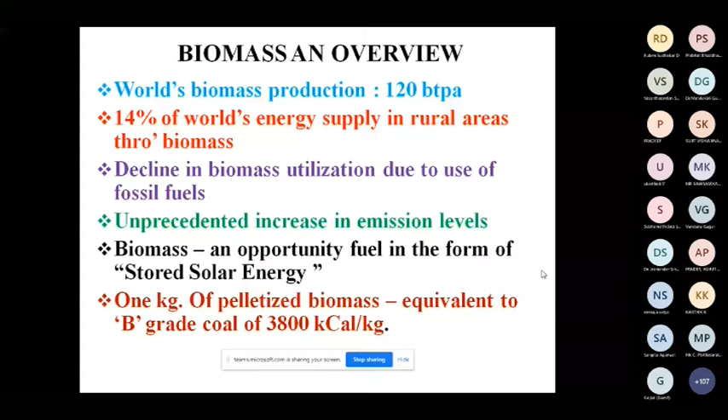So biomass can be environmentally friendly, and it can also be a renewable resource, because the plants that make biomass can be grown again and again. So biomass fuels provide substantial benefits as far as the environment is concerned.

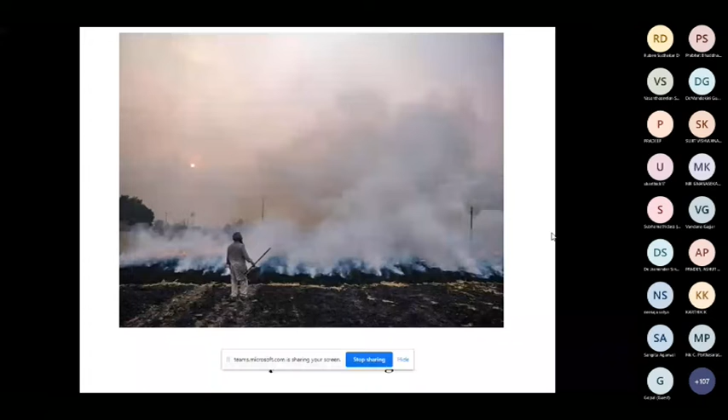Biomass combustion tends to generate dust that stays airborne longer than coal. This is what you are seeing in the picture from the Punjab, Haryana side - trouble from burning of the crop residue, smog, and poor air quality. This affects the capital Delhi very much, as you can see. Last September, you would have seen in the newspaper that the Indian government has asked thermal power plants located within 300 kilometers of the capital Delhi to co-fire biomass with coal to reduce pollution. You know what happens in Delhi in the months of November, December, January.

Pollution, mainly particulate matter and aerosols, is caused by farming - the burning of straw fuel in and around Delhi areas. The Commission for Air Quality Management for the National Capital Region (NCR) and adjoining areas has identified 11 power plants to co-fire 5% to 10% biomass with coal. This direction has been given to all 11 coal-fired power plants to use 5% to 10% biomass with coal to cut pollution and reduce stubble burning in farms.

According to the Federal Environmental Ministry, paddy straw burning is a matter of grave concern in the national capital region and adjoining areas. Proper utilization of paddy straw is an important strategy among the various means to reduce burning. So there is a need, given the surplus biomass availability, for disposal of agriculture residues - not just disposal, but safe disposal of agriculture waste. You cannot burn it as you like in the farms.

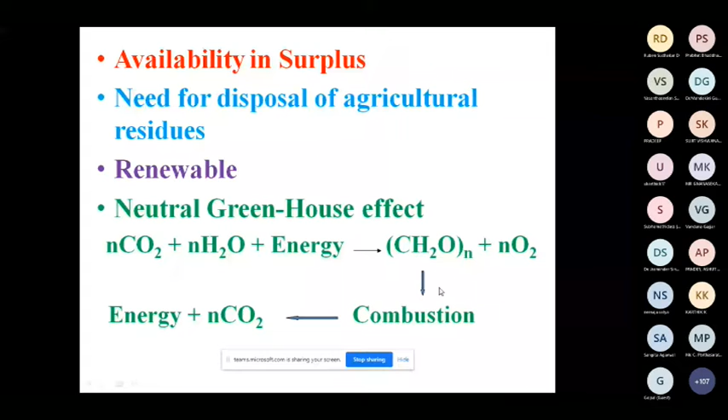Non-fossil biomass fuel is again renewable; it gives a neutral greenhouse effect. From photosynthesis, biomass is formed; from biomass we get energy back through combustion, releasing CO2 again. So this is what is meant by neutral greenhouse effect. Again, biomass can be a source of liquid fuel - you can go for biodiesel. In the last session you have seen wood gas.

Most biomass is used as a solid fuel. It is also used in limited amounts for biodiesel and biogas, but solid fuel remains the most common use.

There are opportunities to grow industrial biomass from numerous types of plants, including miscanthus, switchgrass, corn, willow, sugarcane, and bamboo. So opportunities are available to grow energy crops.

Now, all biomass fuels are not the same. There is a lot of variation within the various types of biomass. The same biomass in our country versus another country will differ in quality. So all biomass fuels are not at all the same—you have to understand that.

To use biomass as fuel, or to design a boiler or equipment for heat and power generation, one needs to understand the characteristics of the biomass in order to avoid possible problems and utilize it more effectively. So there comes the characterization of biomass fuel.

As I told you, in the 1990s I did a research project on these biomass fuels. There I utilized all 12 characterization techniques for biomass characterization. Now I am going to explain what I did in 1995.

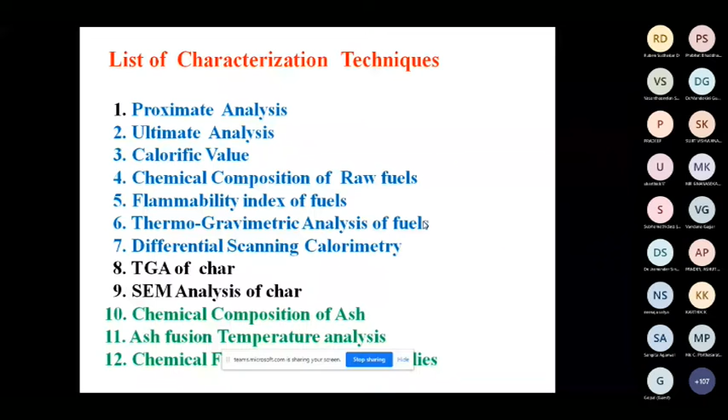As I said, I selected 7 biomass fuels for my characterization study. Of course, others have done similar work, but my focus is on these 7 biomass fuels: coir waste, groundnut shell, bagasse, sawdust, wheat straw, rice straw, and rice husk. These are the 7 biomass fuels I focused on in my research project.

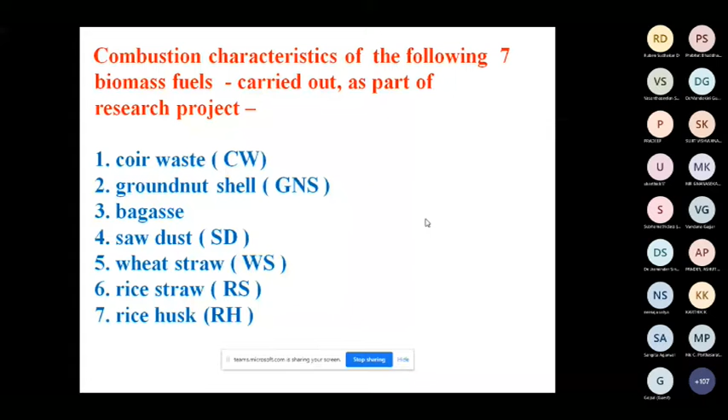Let's start with proximate analysis. I don't know how many are familiar with proximate analysis. Proximate analysis means determination of moisture content, volatile matter, fixed carbon, and ash. I will explain how we do this in simple terms.

You take about 1 gram of sample, weigh it in a crucible. The crucible is placed inside an electric hot air oven maintained at 105 to 110 degrees C, and allowed to remain for 1 hour. Then you take it out and find the weight loss. Whatever weight loss you get after keeping it for 1 hour at 105 to 110 degrees can be accounted for as moisture. The percentage moisture equals the loss in weight divided by the weight of the sample. So this gives the moisture content.

The second one is volatile matter. The dried sample left in the crucible is covered with a lid and placed in an electrical furnace, a muffle furnace, maintained at 900 degrees—some people say 925 degrees. ASTM says 900 degrees, though some use 925. At 900 degrees, keep it inside the furnace for 7 minutes. The sample should be covered with a lid.

Then take it out and find out the weight loss. Whatever weight loss occurs for 7 minutes at 900 degrees centigrade is the volatile matter. So loss in weight due to removal of volatile matter divided by sample, multiplied by 100, will give you the volatile matter content. So that's moisture and volatile matter.

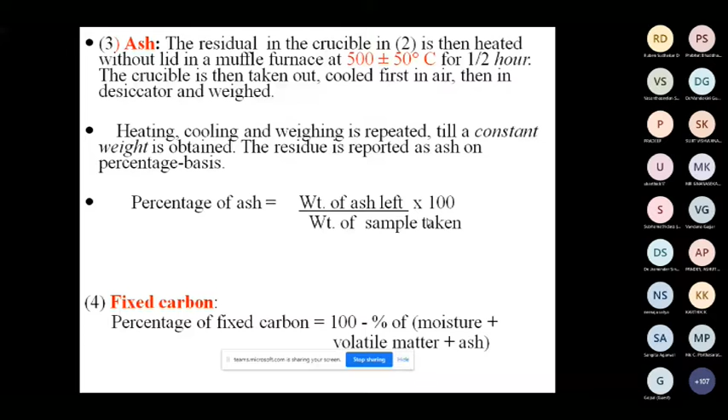Moisture, volatile matter, ash content, and fixed carbon - it's the proximate analysis. The importance of proximate analysis is it provides valuable information with respect to the quality of the fuel. So for any fuel, proximate analysis and calorific value are very primary and very important analyses to understand the fuel.

From moisture, lower moisture means effective calorific value. Moisture quenches the fire in the furnace, hence lesser the moisture, better the fuel. Similarly, for handling, higher the moisture, the more difficult the handling will be.

Volatile matter: high volatile matter containing biomass burns with a very long flame and high smoke. From the ignition point of view and flame stability point of view, volatile matter is good. So high volatile matter content means a high proportion of fuel that will be distilled and burnt as gas and vapor. However, volatile matter present in the biomass may not be completely combustible - sometimes methane, hydrocarbons, CO2, nitrogen, or water may be present. So don't imagine volatile matter is completely useful. Part of it may be combustible, and part may be non-combustible as well.

Ash is a non-combustible matter which reduces the calorific value of the biomass. Moreover, ash causes hindrance to the flow of air and heat, thereby lowering the temperature. It often causes trouble during firing by forming clinkers which block the interspaces of grate-fired boilers. So ash causes a lot of problems - slagging, fouling, deposition, corrosion. We'll be facing a lot of ash-related issues, which we'll deal with finally - what are the ash-related problems.

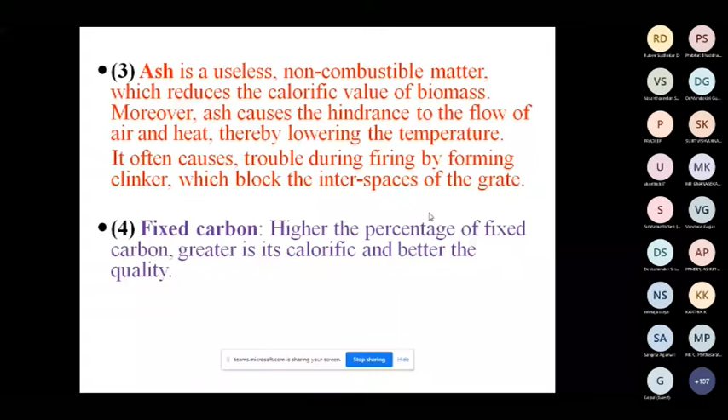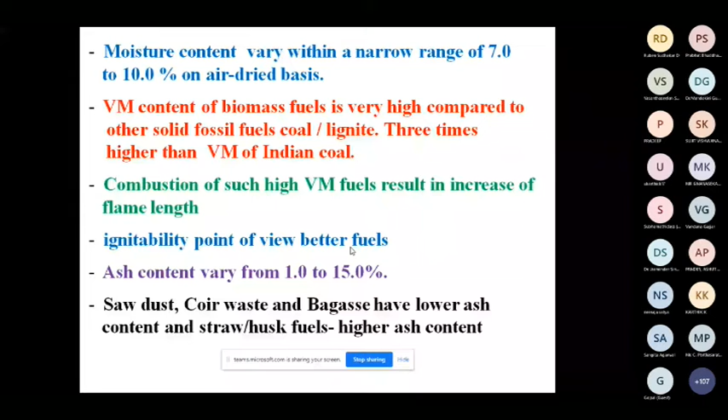Next one is ultimate analysis. Determination of carbon content, hydrogen content, nitrogen, sulfur, and oxygen. This is called ultimate analysis or elemental analysis of the fuel, whatever way you call it. Carbon, hydrogen, how it is determined?

You take accurately 1 to 2 grams of biomass sample, burn it in the current of oxygen in a combustion apparatus. The carbon available in the biomass will be converted into carbon dioxide because of oxygen and high temperature. Hydrogen available in the fuel is converted into water.

These two, CO2 and water, will be passed and absorbed by a potassium hydroxide tube and a calcium chloride tube of known weight. Increase in weight of the KOH tube indicates CO2 content. Increase in weight of the calcium chloride tube indicates water content from water absorption. So from that increase in weight you can calculate carbon, and from increase in water you can calculate hydrogen content.

Percentage of carbon is equal to increase in weight of the KOH tube into 12 into 100, divided by weight of the sample and 44. The 44 is for CO2 - if you have 44 of CO2, then 12 is carbon. So from 44 to 12, the increase in weight gives you the total CO2, and from total CO2 you get how much carbon. Divided by weight of the sample into 100, it will give you percentage of carbon.

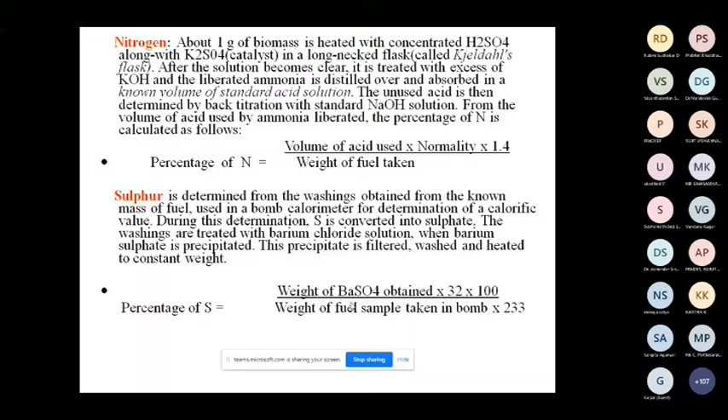Oxygen is obtained differently - percentage of oxygen is equal to 100 minus percentage of carbon, hydrogen, sulfur, nitrogen plus ash content, as we are doing in the proximate analysis. From that you can calculate whatever carbon, hydrogen, nitrogen, sulfur, oxygen content in the fuel. That is called ultimate analysis of the fuel.

These are all conventional analysis methods. If you do it by whatever method I told, carbon, hydrogen, nitrogen, it will take minimum for one fuel - I think 1 or 2 days. Doing the Kjeldahl method, then sulfur method, carbon, hydrogen - it will take maximum 2 days per analysis. Nowadays our instrumental technique has come.

Instrumental technique of carbon, hydrogen, nitrogen, sulfur method involves the quantitative conversion of carbon, hydrogen, nitrogen, sulfur into their respective gases during combustion of the sample at elevated temperature in oxygen. As I said earlier, carbon will be converted to carbon dioxide, measured by IR cell. Similarly, hydrogen will be converted to water, measured by infrared cell.

Nitrogen will be converted to NOx, then again through catalyst it will be converted to nitrogen, which is measured by thermal conductivity. Then sulfur, at very high temperature of 1350, is converted to SO2, measured by IR.

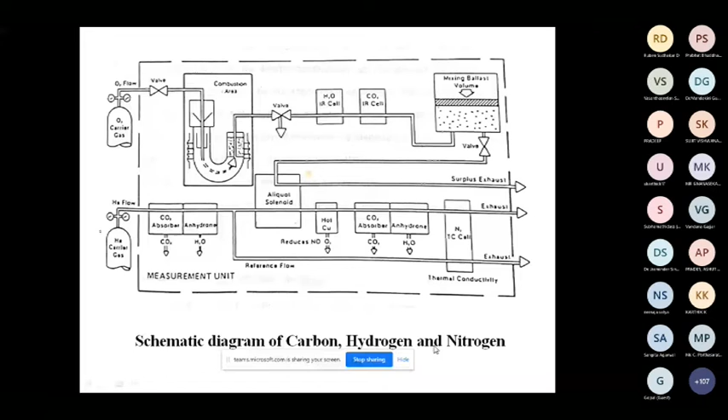Now the significance of ultimate analysis: greater the percentage of carbon and hydrogen, better is the fuel quality and calorific value. Naturally, if you have more carbon and more hydrogen, the calorific value will also be more. Also, a higher percentage of carbon reduces the size of the combustion chamber. The amount of carbon and major combustible constituent of the fuel depend on the type of biomass.

Nitrogen has no calorific value. The only thing is, from a pollution point of view, it will give fuel NOx, hence it's undesirable. Sulfur, although it contributes only a little to heating, produces SO2 and SO3, which are harmful - corroding equipment and causing pollution.

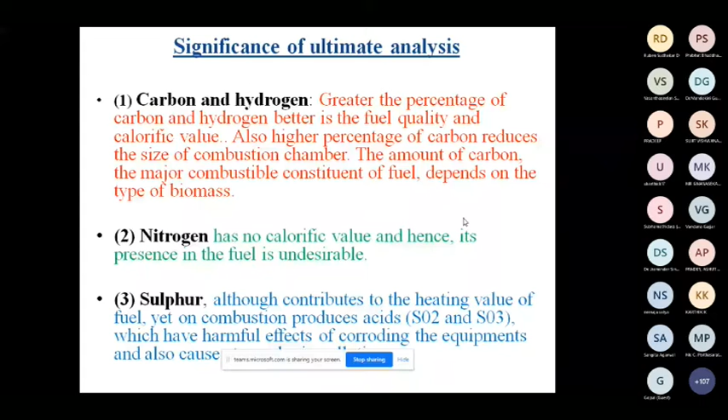So this is the typical result of ultimate analysis for the 7 biomass fuels, compared with coal also - the bottommost is coal. If you see the carbon content of biomass, it is almost similar to coal: here you have 45%, 42%, 42%, or straw fuels maybe around 35, 36 - almost similar to coal as far as carbon is concerned.

But interestingly, if you see the hydrogen content, coal has 2.4% hydrogen, whereas all biomass fuels are almost more than 2 times that - 5.26%, 5%, 5%. So more than 2 times that of coal, the hydrogen content of biomass fuel. In that way, it's a better fuel.

The nitrogen content - except groundnut shell - all biomass fuels have nitrogen content lesser than coal. You have 0.45, 0.61, 0.72, 0.7, 0.2, whereas coal has around 1.06, normally 0.8 to 1.2% for coal. So except groundnut shell, all biomass nitrogen content is much lesser than coal.

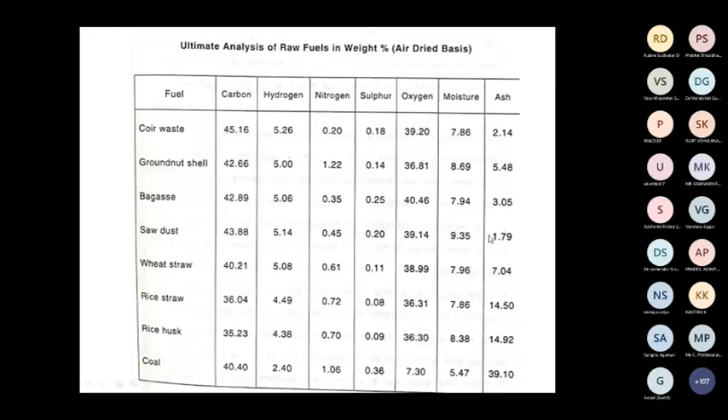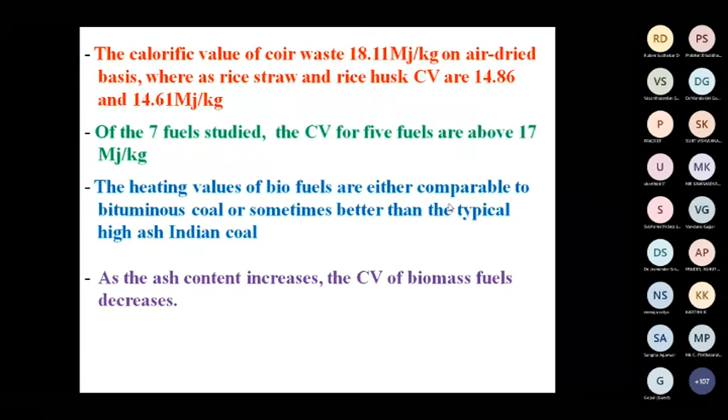Similarly, as moisture content increases, calorific value comes down. High heating value, HHV, and LHV are the same as gross calorific value or net calorific value. Both are the same, whether you call it high calorific value, gross calorific value, net calorific value, or lower calorific value. So as moisture content increases, the calorific value comes down.

Biomass is made up of a structure, mainly a lignocellulose structure. It mainly contains cellulose, hemicellulose, and lignin. The proportion and distribution of these components in the biomass is complex and very important for its use in different industrial applications. So determination of cellulose, hemicellulose, and lignin is very important as part of the characterization study.

Cellulose is a high molecular weight polymer with molecular weight up to 10 to the power of 6, making up the fiber in wood and other biomass. Hemicellulose are branched polymers, also polysaccharides, consisting of shorter chains. Hemicellulose generally evolves as light volatiles. Most of the contribution of volatile matter comes from hemicellulose, producing less char. So the volatile matter contribution from hemicellulose is more compared to cellulose or lignin.

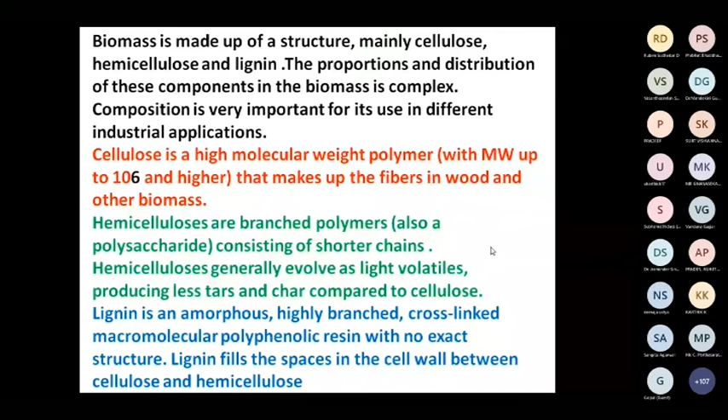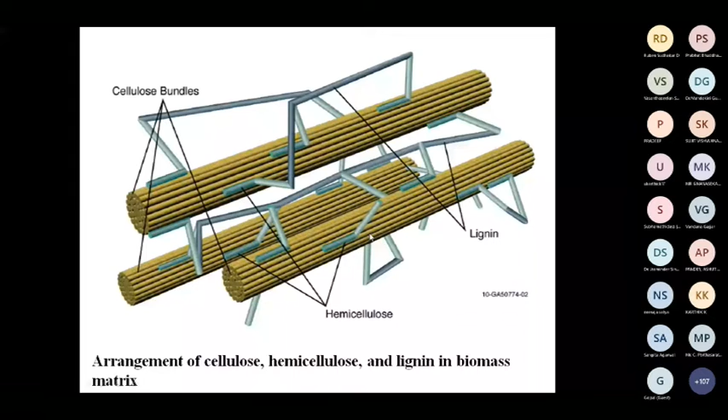Lignin is amorphous and a highly branched, cross-linked, macromolecular, polyphenolic resin with no exact structure. Normally, lignin fills the spaces in the cell wall between the cellulose and hemicellulose. This is the structure, the arrangement - these are all cellulose, these are all hemicellulose, attached by the lignin content. These are the lignin content, showing the arrangement of cellulose.

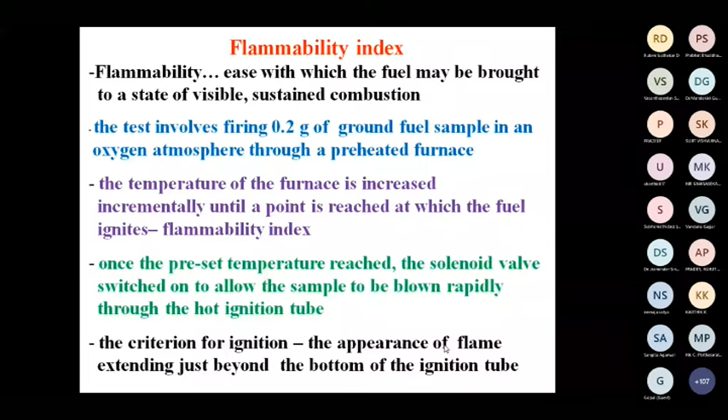This is the instrument for flammability testing - this is the furnace. Here you take the finely ground sample, and here there is a solenoid valve. Oxygen is supplied from a cylinder under pressure.

You go on increasing the temperature of the furnace as you decide. Once the temperature is set, you open the solenoid valve. Through oxygen pressurization, the sample is pushed through these tubes, and there you watch for the flame. If there is a visible flame, that is the ignition point.

Otherwise, you increase the temperature by another 5 degrees, going on increasing right from ambient temperature or from 200 degrees. At what temperature do you get a stable flame? Each time you have to put the sample in and then operate the solenoid valve.

So flammability refers to the lowest temperature at which a visible sustained flame appears. If we compare the flammability temperature for all the fuels, it varies from almost 350 to 400 degrees. For coal, we have 500 degrees.

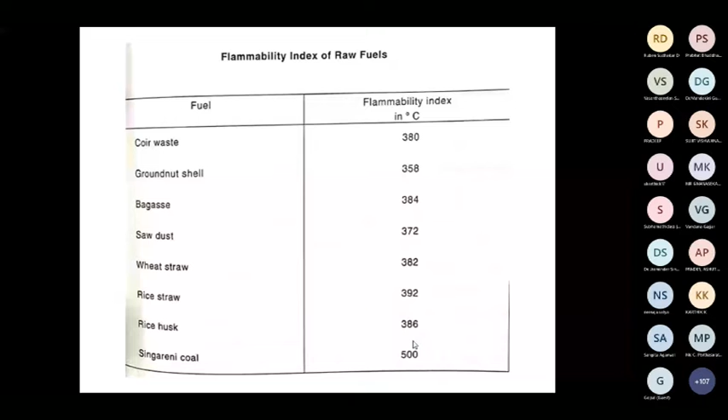So from a flammability point of view, biomass fuels are better fuel, easily ignitable due to high volatile matter content. Flammability refers to the lowest temperature at which a visible sustained flame appears. The flammability index of biomass fuel is within a very narrow range, 350 to 400 degrees C, which is less than fossil fuels. Stable combustion can be easily achieved at comparatively lower temperature than coal, as biomass fuels are more reactive with respect to flammability characteristics than lignite or coal.

As hemicellulose content increases, flammability index decreases. Higher the hemicellulose content, the more volatile the fuel, so naturally the flammability index or temperature comes down, making it easily ignitable.

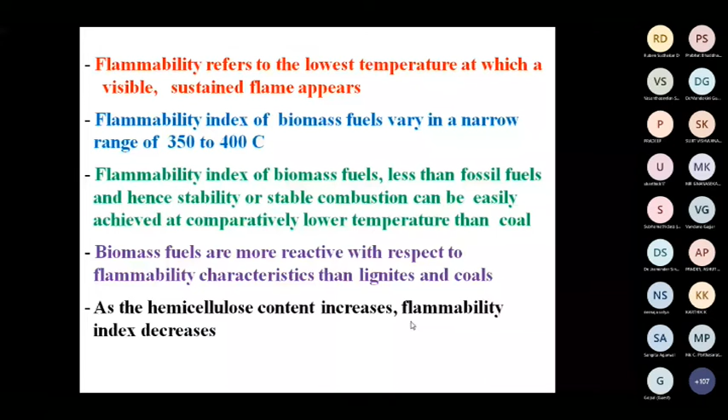Next characterization: fuel size and density. The size and density of biomass fuel particles affect the burning characteristics of the fuel by affecting the rate of heating and rate of drying during combustion. So size and density play an important role with respect to combustion.

Fuel size also dictates the type of handling equipment used. Wrong size of fuel will have an impact on the efficiency of the combustion process and may cause jamming or damage to the handling equipment.

Smaller sized fuel is more common for commercial scale systems because smaller fuel is easier to use in automatic feeding systems and also allows finer control of the burning rate. The smaller the fuel, the more finely you can control the burning rate, making it easier.

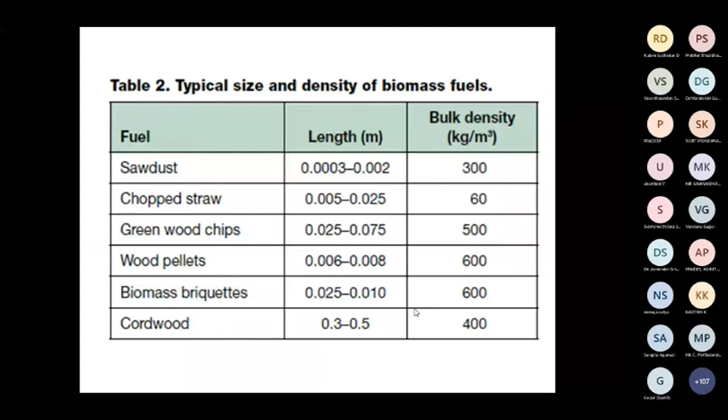Regarding strength and bulk density, the higher the size, the more the bulk density will be. So fuel size and density are probably the most overlooked factors affecting fuel performance and should be given careful consideration when selecting the fuel type.

Biomass can also be delivered to power plants in bales. For example, straw fuel in the form of bales can be supplied and delivered to power plants. This format is mostly used for straw and requires special equipment to remove the strings and break up the bale, or the plant may be designed specifically to burn bales.

Bales are relatively easy to transport, have good bulk density, and can also be stored in the open for shorter periods of time. Modern large bales can weigh up to 300 to 500 kg.

Dry biomass needs to be stored under a cover to avoid self-heating. Self-heating is another important aspect, leading to decomposition, growth of spores and fungi.

Lower bulk density, 200 to 500, compared to coal means volume to store as well as physical transport capacity will be large compared to coal. Coals are high density fuels compared to biomass fuel. These are low density fuels, biomass.

So methods to increase the bulk density are pelletizing or briquetting. These are the techniques available to increase the bulk density of the fuel, which also improves the bulk handling properties of the fuel. And dried pellet or briquette will have a higher calorific value. That's another advantage, but it is more expensive.

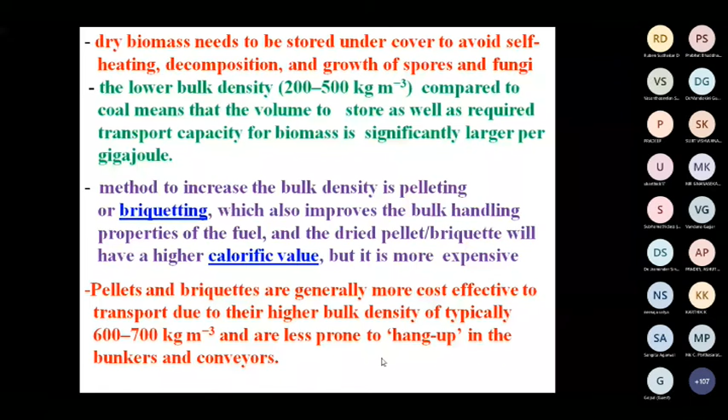These are the pellets, wood pellets. Pellets are biomass compressed to small cylinders with a typical diameter of 5 to 15 mm and length around 10 to 50 mm. They have higher standard bulk density and are clean and dry comparatively because of pelletizing, as all the moisture gets removed. There will always be less than 10%, so consistent quality you can get.

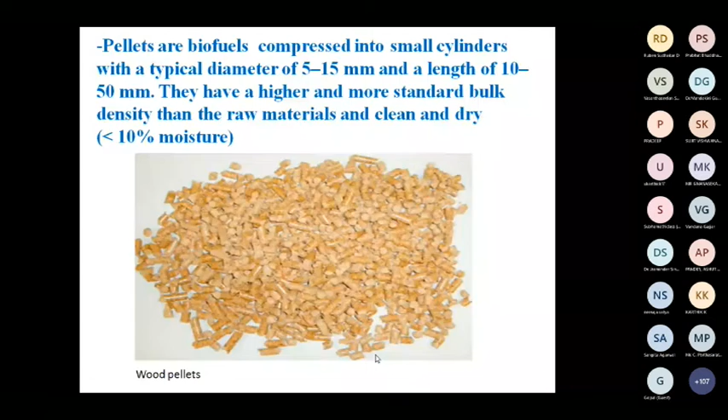Next technique is the characterization technique, thermogravimetric analysis, TGA. The thermogravimetric analysis measures change in weight of a material as a function of temperature or time in a controlled temperature program atmosphere. Here, while heating the sample, ultimately through combustion, what we are doing is heating the sample fuel.

While you are heating the fuel, what happens to the mass weight? That is what we are studying with the TGA technique. You cannot study the mass loss within the boiler, but you can simulate the conditions of heating in the laboratory instrument, that is TGA. You have the furnace and balance both together, so you measure the change in weight as a function of temperature or time in controlled heating.

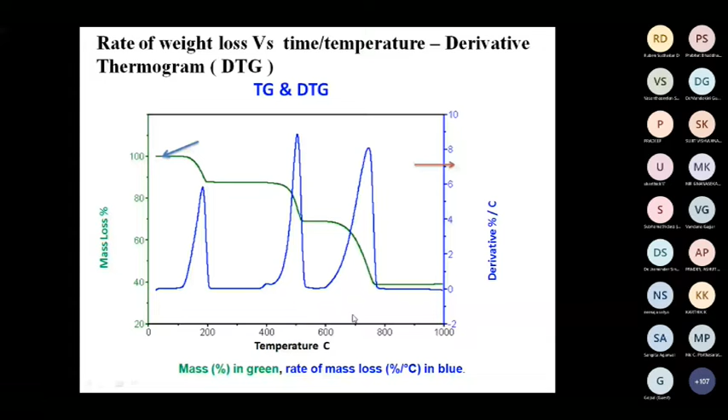This is again, for the coal chart, the weight loss thermogram. This is the derivative thermogram, the blue one.

So the burning profile technique is for assessing - ultimately we are interested in the combustion reactivity of any fuel, whether coal or biomass, any solid fuel - the combustion reactivity, the time, speed, rate at which you are handling the combustion, heating. So the burning profile technique for assessing the reactivity is where the derivative thermogram output signal from a thermobalance system is plotted against the temperature. That is called the burning profile test.

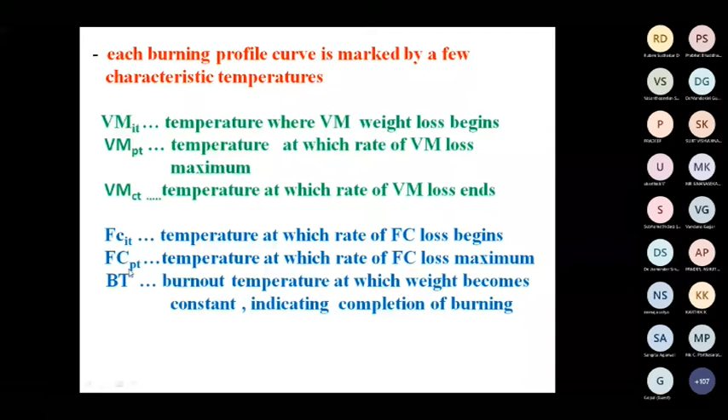So this is VMIT, initiation of volatile matter; the temperature at which volatile matter is maximum, VMPT; here you can call it VM completion; then start of fixed carbon, maximum temperature at which fixed carbon burning rate occurs, then BT, the final temperature where all completion occurs, called BT.

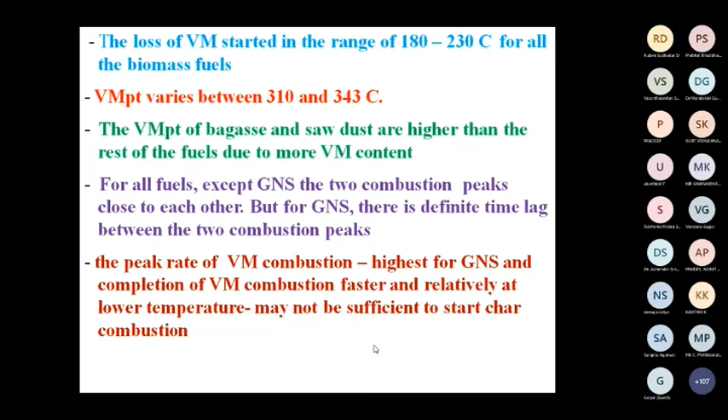For all fuels except groundnut shell, the two combustion peaks are close to each other. For groundnut shell, there is a time lag between the two. The reason being the peak rate of VM combustion is highest for groundnut shell, and completion of VM combustion occurs at a faster rate - because, as we have seen, it completes at 350 degrees.

Maybe 350 degrees is not sufficient to initiate fixed carbon combustion, so it takes up to 390 degrees to start initiation. So here, VM release and combustion for groundnut shell is very fast - that's one of the indications. VM release and combustion is so quick for groundnut shell, that's why there is a time lag.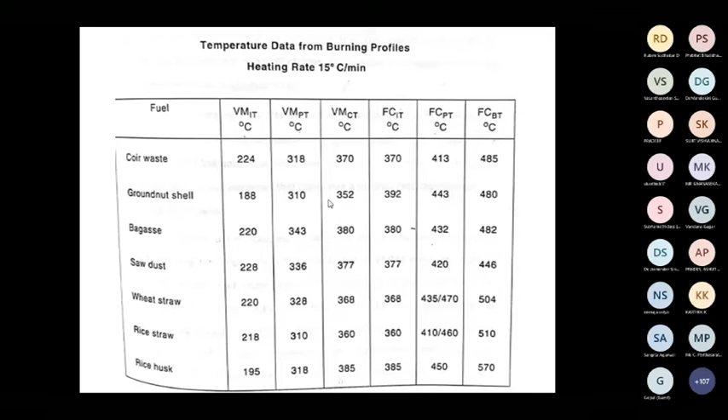The fixed carbon initiation for all the fuels is in the range of 360 to 380, except groundnut shell. Fixed carbon peak temperature for all the fuels except rice husk is in the range of 410 to 435 degrees C. Two overlapping fixed carbon components were observed for rice straw and wheat straw - we have seen the overlapping peaks for these, rice straw and wheat straw.

The burnout temperature for biomass fuels are in the range of 446 to 570. The burnout temperature for fuels follows this order: rice husk is the highest, followed by rice straw, wheat straw, groundnut shell. It indicates that among the biomass fuels, complete combustion will be difficult for rice husk.

In a comparative sense, among all the biomass, rice husk's combustion will be very difficult. Complete combustion will be very difficult. I don't know how many of you observed, whenever rice husk is given, you end up with a black ash, not white ash. Very difficult, unless otherwise we have very slow combustion, you end up with white ash. Otherwise, rice will result in black colored ash. Complete combustion is very difficult for rice husk.

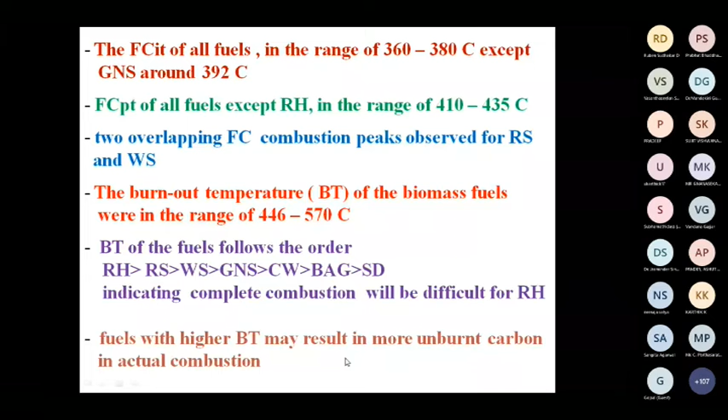So differential scanning calorimetry, DSC, is one of the most frequently used techniques in the field of thermal characterization of solid, coal, biomass. DSC measures differently from TGA - TGA measures weight loss, nothing to do with calorific or heat content. Whereas DSC measures the differences in heat flow into the substance and reference as a function of temperature, while both are subject to a controlled temperature program. So DSC provides access to accurate thermodynamic data as well as information regarding reactivity, phase transition, and heat flow.

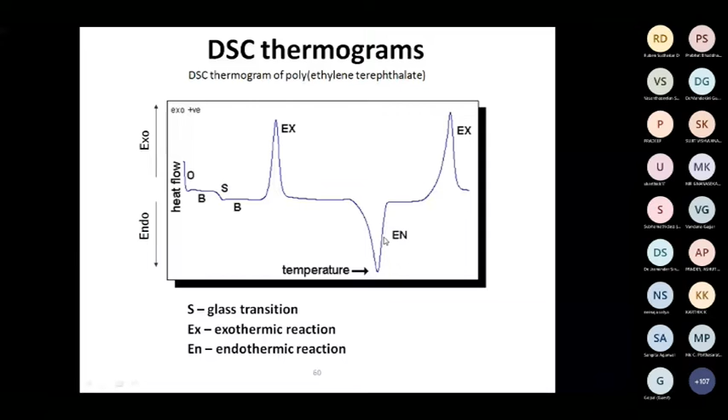So in DSC, these are the exothermic peaks, heat release from the sample. These are the endothermic peaks, heat absorption by the sample. So this is useful to study aspects related to reactivity, heat transfer associated with pyrolysis, and heat of combustion.

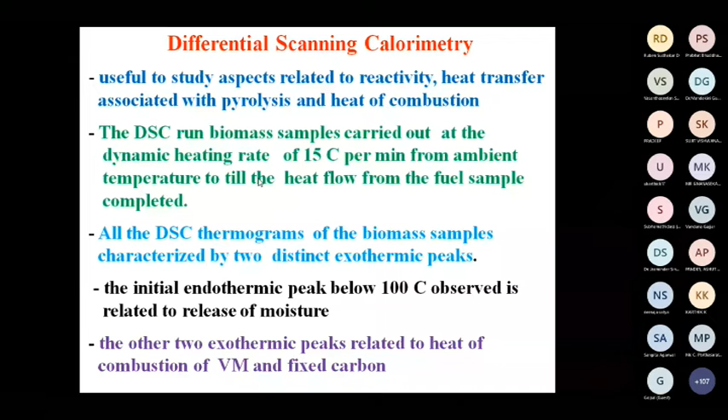DSC runs for all the biomass samples are carried out at a dynamic heating rate of 15 degrees C per minute from ambient till the heat flow from the fuel sample is completed. All the DSC thermograms of the biomass samples are characterized by one initial and two distinct exothermic peaks, similar to TGA. The initial endothermic peak, observed below 100, relates to release of moisture. The other two exothermic peaks relate to heat of combustion of volatile matter and fixed carbon.

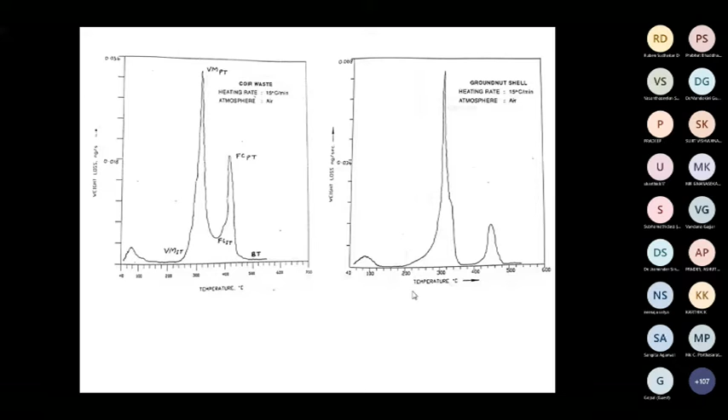These two follow similar to TG - rice straw, wheat straw, rice husk. See this observation: the DSC profiles reveal the intensities of heat release by the fixed carbon fraction of fuels. Coir waste, groundnut shell, bagasse, sawdust show intensity of heat release more than that due to VM. That is one of the peculiar observations with respect to TG compared to TG. But wheat and rice show the reverse trend - the heat release due to fixed carbon is lesser than that of the VM.

The higher DSC intensity for the second peak for coir waste, groundnut shell, bagasse, and sawdust is due to the highly porous structure of the chars of these fuels, as exhibited by SEM - we will see the SEM picture. Once volatile matter is released, we call it a char. The char of coir waste, groundnut shell, bagasse, and sawdust are highly porous.

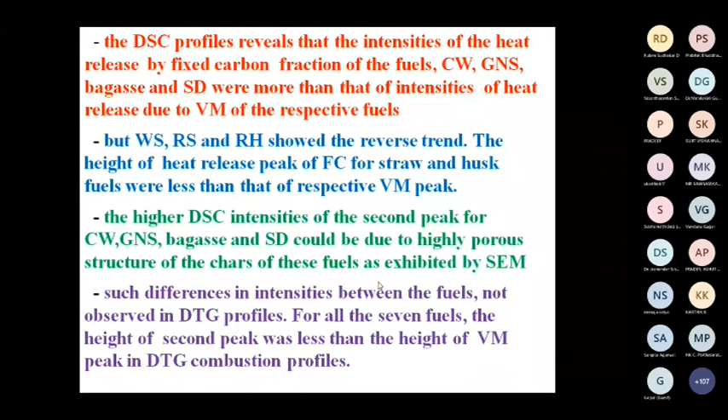Now we will come to the combustion characteristics of the biomass char.

Whenever a fuel particle is injected into the furnace, whether a solid fuel, biomass, or coal, the first activity is release of moisture. This is the first step. The second one is release of volatile matter and its combustion.

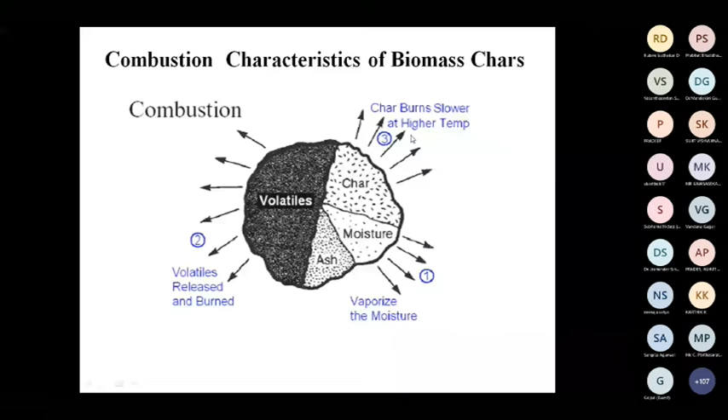The third activity is, once moisture and volatile matter are removed, what remains is called char. Char is nothing but fixed carbon and ash. So the next step is burning of fixed carbon, which burns at a slower rate and much higher temperature. This is the last step, and this is the overall combustion process in the furnace.

So in the fuel particle, first devolatilization occurs and volatile matter is removed. It takes some milliseconds. Once volatile matter is removed, what remains is char. Volatile matter undergoes homogeneous combustion, while char, being a solid, undergoes heterogeneous combustion. The volatile matter combustion takes only a few milliseconds, whereas the heterogeneous combustion of char particles takes 1 to 2 seconds.

Among these two processes, char combustion is a very slow process. Volatile matter combustion takes only milliseconds because it is gas combustion, a homogeneous combustion, and volatile matter is nothing but a gas, so it happens at a much faster rate. Char combustion takes a few seconds, since it is a slower heating process.

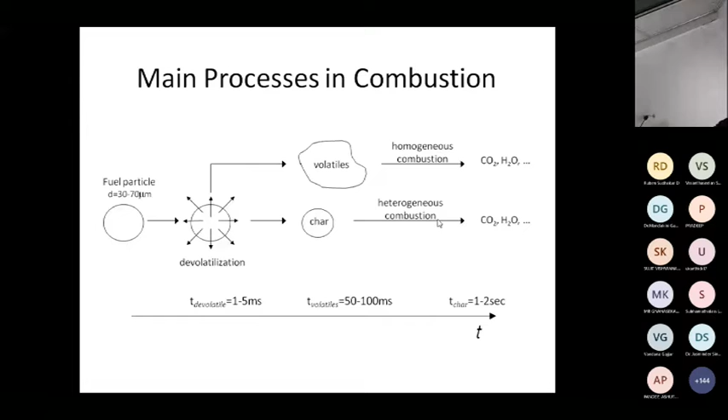So combustion of any solid fuel can broadly be separated into two types of reactions. The fuel is converted to volatile matter (VM) and char. VM leads to a gaseous combustion product, while char leads to a gaseous combustion product plus ash.

When the solid fuel is injected into the combustion chamber, it first heats up rapidly, and devolatilization of volatile matter occurs within a fraction of a second. The subsequent combustion of this gaseous matter is instantaneous and rapid. The last activity is combustion of char, which takes 1 to 2 seconds.

Since char combustion is a slow process, it becomes the critical step in determining the rate of combustion. So the rate of combustion is decided by the slow process. If you want to study the reactivity of a fuel, you don't need to study the volatile matter; it is sufficient to study the char combustion, because char combustion is the determining step.

The char residues remaining after removal of volatile matter from the biomass samples are collected, and we study the char kinetics using TGA, looking at the same reactivity pattern. Earlier we studied the raw fuel; now we have prepared the char after removal of volatile matter, and char studies were made using TGA.

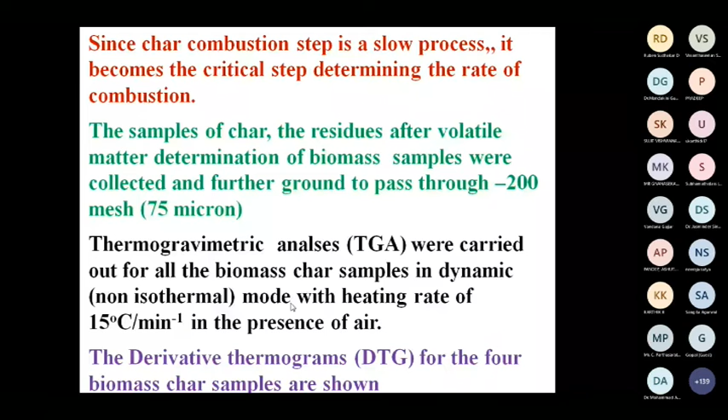Thermogravimetric analysis is carried out for biomass char samples in a dynamic, non-isothermal mode with a heating rate of 15 degrees per minute in the presence of air. The derivative thermogram, for simplicity, I am representing only for 4 biomass char samples: coir waste char, sawdust, rice straw, and rice husk.

These are the DTG profiles for these 4 chars. They are characterized by the initiation of char combustion, the char combustion peak rate, and the burnout temperature, the final temperature. These are the 3 or 4 characteristic temperatures for char combustion.

If you see this number, among all the fuels, rice husk has the highest burnout temperature at 648, whereas the others are 537, 518, 540, and 560. This 648 clearly indicates that rice husk's combustion is relatively very difficult. Complete combustion of rice husk will be difficult compared to all the other fuels because of this 648 degrees. This is one of the important conclusions you can draw.

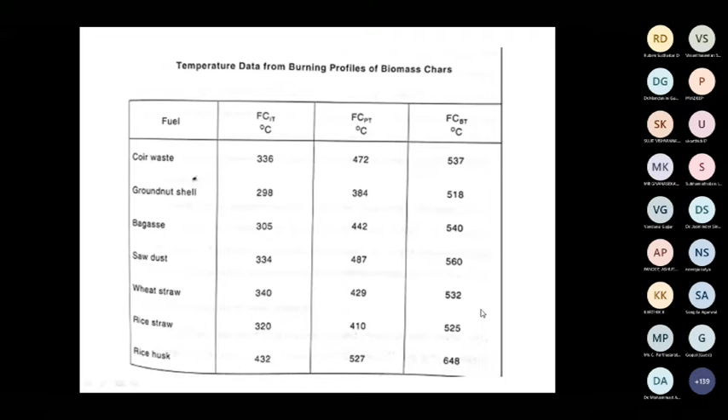So based on the burnout temperature, you can determine which fuel can be burned completely more easily. You can see here groundnut shell is very easy, close to 518, followed by coir waste. Among the fuels, rice husk is the highest, making it very difficult.

The review of the data indicates the temperature profile of rice husk is exceptionally different from that of other fuel chars. While thermal decomposition of fixed carbon in other char samples starts around 310 to 340, decomposition of rice husk starts only around 430. This highest fixed carbon initiation temperature for rice husk suggests that it will be very difficult to initiate char combustion for rice husk compared to other fuels.

Based on these char kinetics and char reactivity DTG data, we also made kinetic calculations.

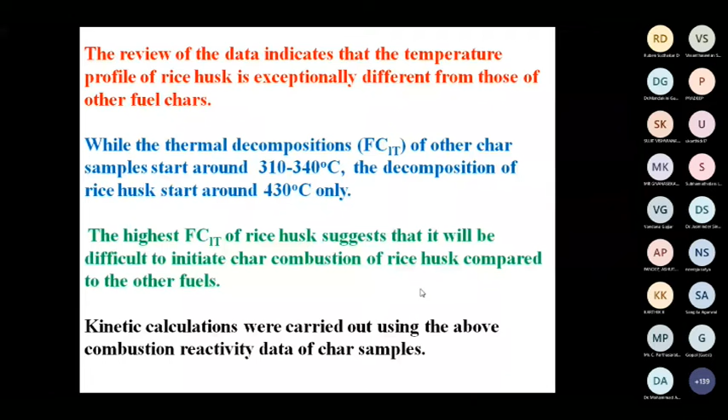The rate of combustion of char is given by the rate of reaction. In chemistry terms, the rate of reaction or rate of combustion is given by dW/dt equal to K into (W minus W). Here W is the weight of the undecomposed char.

This is the ash. Weight is the weight of the ash at the end of combustion. So W minus W will give the concentration of the reactant, where W is the weight of the undecomposed char and the other W is the final ash. So W minus W is the concentration of the reactant, and the rate of reaction is proportional to the concentration of the reactant.

K is the combustion rate constant, which is defined by the Arrhenius equation: K is equal to A into E to the power minus E/RT. ln K is equal to ln A minus E/RT, where E is the activation energy, and R and T are the universal gas constant and absolute temperature respectively.

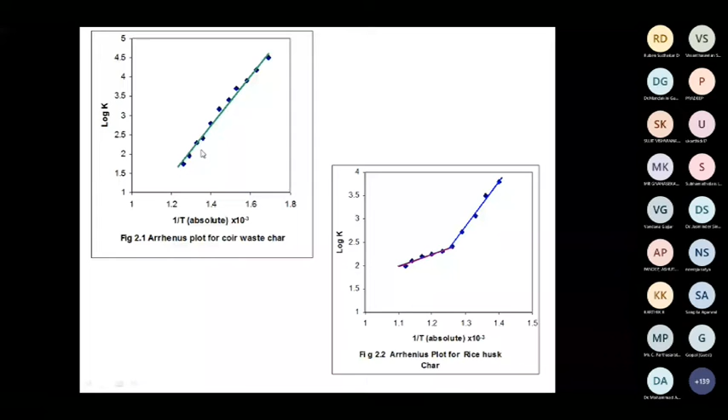The poor reactivity of rice husk char in non-isothermal conditions indicates that 100% carbon conversion in rice husk will be difficult compared to other fuels, and combustion of rice husk may produce more unburned carbon in actual combustion. Coir waste, bagasse, sawdust are more reactive and almost equal at lower temperature. So higher furnace temperatures are required to make carbon conversion more efficient for straw and husk.

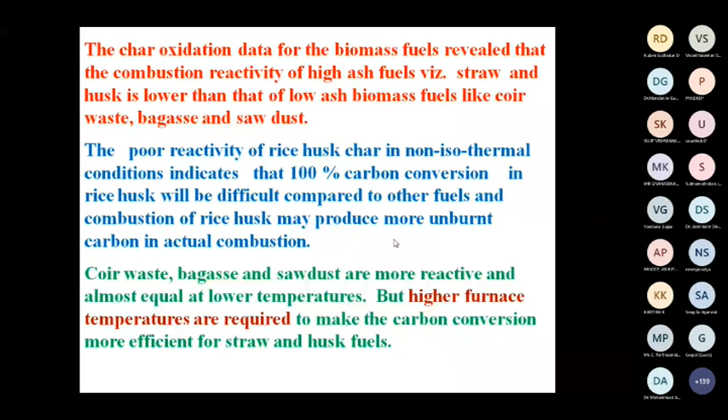So if you are planning to fire straw or husk fuels, you need higher temperature, whereas other fuels work even at low temperature. That is why for these fuels, low temperature gasification is a better route for coir waste and sawdust. If you want to use liquid fuels, low temperature gasification for coir waste and sawdust is a better route compared to complete combustion.

The activation energy for the char combustion data indicates the combustion is predominantly chemically controlled for fuels like bagasse, sawdust, and coir waste due to highly porous structure, whereas the diffusion mechanism is the controlling factor for husk and straw fuels due to non-porous structure, which is reflected in the higher activation energy.

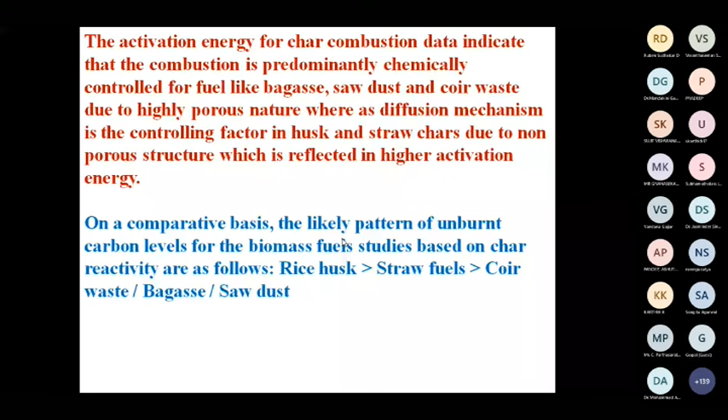On a comparative basis, the likely pattern of unburned carbon level for actual biomass fuels studied, based on their char reactivity, rice husk will give more unburned carbon, followed by straw fuels, then coir waste, bagasse, and sawdust. This is a conclusion I drew from this surface area, you can see here.

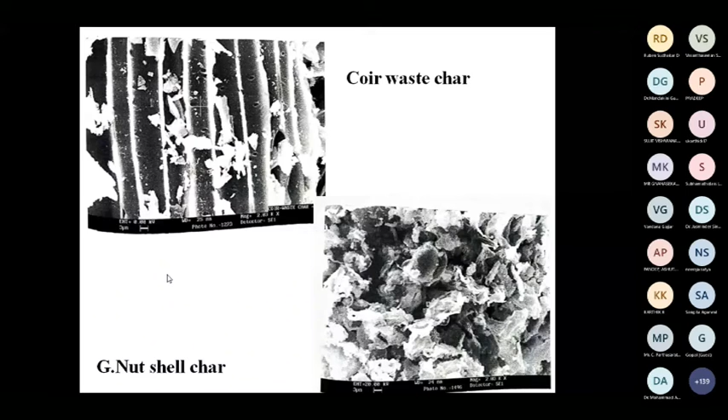That is why now you can explain, now you can confirm that the DSC profiles of second peak are more intense than first peak because of highly porous structure. The entire surface is available for heat release with respect to coir waste, bagasse, and sawdust. If you consider wheat, straw, rice, these are all not highly porous. Rice is also not highly porous.

Now we'll move on to ash biomass characteristics. So far we have seen the combustion reactivity, so many things, the characteristics related to TGA, DSC, flammability, proximate, ultimate, calorific, everything related to combustion. Now we shift to ash characteristics. Not all the problems will be facing because of biomass.

The inorganic materials in biomass can be divided into two broad categories. One is inherent inorganic material, which exists as part of the organic structure of the fuel and is most commonly associated with the functional groups of oxygen, sulfur, nitrogen. Something like chemistry, you can understand COONa, COO potassium, or amine, NH2 attached to amine. So these are all inherent inorganic materials.

These organic functional groups can provide suitable sites for these inorganic species to be associated chemically in the form of cations or chelates. So these inorganic species are present in very fine particulate form within the organic structure. The second one is extraneous inorganic material which has been added to the fuel through geological processes or during harvesting, handling, mostly added as extraneous inorganic material, during handling, sampling, processing. So these are the two broad fractions: one is inherent inorganic material, one is extraneous inorganic material.

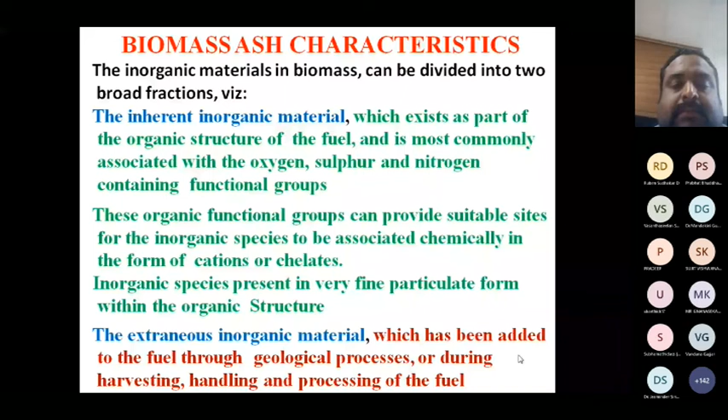And that is a broad fraction. But how to speciate the elemental species in a useful category, how the inorganic content is: one is water soluble, other one is organically associated, third one is precipitated as relatively pure compounds in crystalline or amorphous forms. These are three broad categories.

Speciation, you can see here, these are all inorganics available in the biomass sphere in a water soluble form. If you consider sodium, sodium nitrate will be there, sodium chloride, both are water soluble. Potassium, potassium nitrate, potassium chloride. Calcium, calcium nitrate, calcium phosphate. So these are the things available in the biomass as a water soluble form.

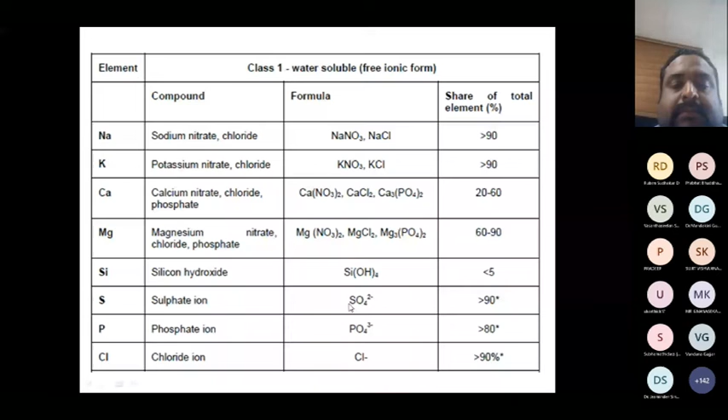Ionic, water soluble. The second category is organically associated, for example magnesium available, or manganese. These are things organically associated with the biomass. Third one is precipitated as a pure compound, there is calcium oxalate or phytoferritin or phytates or phytolites, for example silica. These are come as a precipitate.

So these are broad speciation characteristics. The speciation of inorganic materials is classified according to the class of either water soluble or organically associated or precipitated. These are the three major types.

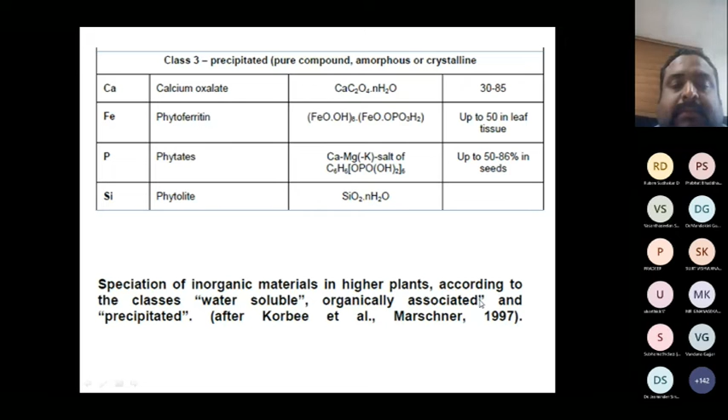The data indicate clearly the inherent inorganic materials in the biomass material: alkali metals, water soluble sulfur, phosphorus, chlorine tend to present as a largely soluble form. Silicon is present predominantly as precipitated silica. A third category, alkaline earth, calcium, are more complex and can be present in a number of forms. The extraneous inorganic materials also present in many forms, in most cases as contamination from sand, soil, or other mineral materials.

For many biomass materials, a significant portion of the inorganic materials is volatile at the conventional ashing temperature of coal, which is 800 degrees. In coal analysis, the ash proximate analysis and ash preparation is carried out at an ashing temperature of 800 degrees. Whereas a temperature of 500 C has been adopted as standard for ash content of biomass determination, to avoid underestimation of ash content due to loss of volatile inorganic material. If you ash biomass at 800 degrees, some of the ash may become volatile and escape, so you will not measure the real ash content. That is why for all biomass fuels, the ashing temperature should be around 500, in order to avoid loss of volatile inorganic compounds.

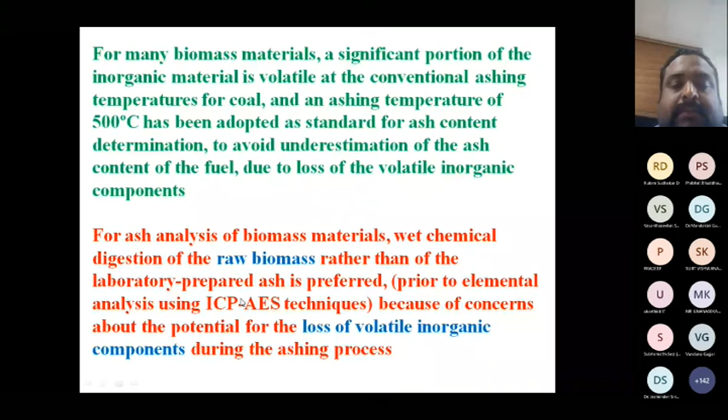The ash content of the majority of biomass materials, with the exception of poultry litter, is around 5 to 7% on a dry basis. Wood material has less than 2%, as with sawdust. Straw and grass materials and solid residues from vegetable oil producing industries have ash content of 5 to 15%. We have seen rice straw and wheat straw are around 14%. All biomass ashes tend to be rich in a fairly similar suite of inorganic species: compounds of calcium, potassium, silicon, phosphorus, magnesium. Clean wood ashes are rich in calcium, silicon, and potassium.

In general, three types of biomass ashes have been described by Bryers. First, high silica, high potassium, low calcium ashes with low fusion temperature. Second, low silica, low potassium, high calcium ashes. Third, high calcium, high phosphorus ashes.

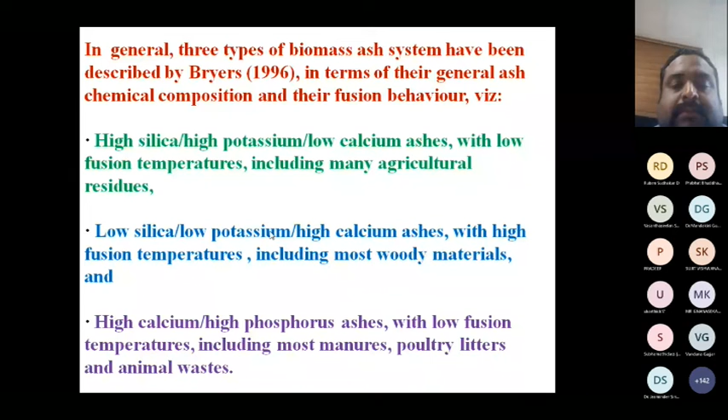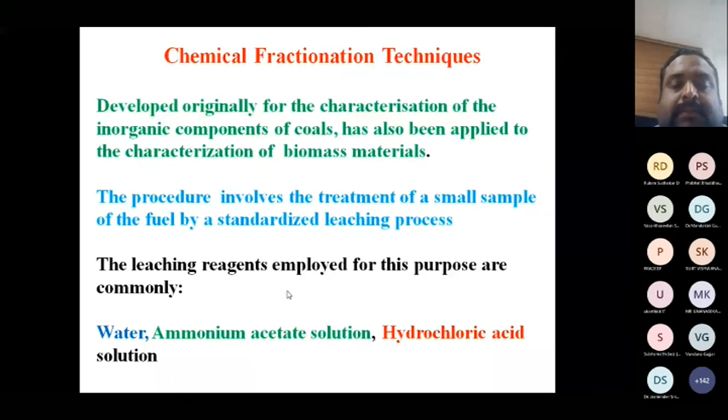The next characterization technique is chemical fractionation, developed originally for characterization of inorganic components of coal, and also applied for characterization of biomass material. The procedure involves treatment of a small amount of fuel, not ash, by a standardized leaching process. The leaching reagents employed are either water, ammonium acetate, or hydrochloric acid, the three standard leaching solvents.

Four fractions are normally obtained. One is water leachable compounds, principally alkali metal salts, sulfur, and chlorine compounds. The second is ammonium acetate leachable compounds, generally associated with the organic fraction, where aqueous cations are chelated. The third is acid leachable compounds, generally carbonates and sulfates. The last is the water leftover residue, solid residue mostly silica and silicate. So the order is water soluble, ammonium acetate leachable, acid leachable, then leftover residue.

It is generally considered that the water and acetate leachable constituents are more readily released to vapor phase. This is the important point: whichever component is released by vapor phase can be easily leached by water or ammonium acetate, forming a very fine aerosol fraction of the ash generated from the biomass at elevated temperature. So if you want to study the vaporous fraction of the inorganic constituents present in the biomass fuel, you have to go for water leachable studies and ammonium acetate leachable studies. Whatever comes out of these two leachable fractions is responsible for the vaporous fraction of the alkali. The last fraction, acid-insoluble residue, is not considered to be released during vapor phase during most thermal processes.

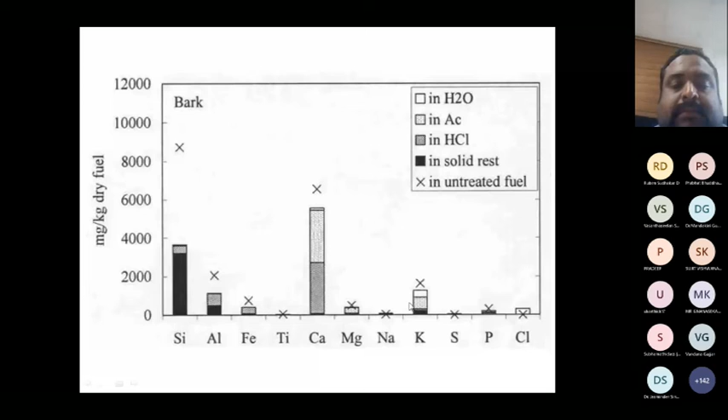These results illustrate differences in the leaching behavior of biomass materials versus conventional fuel. For bituminous coals, very little of the inorganic material in the fuel was found in the water and acid soluble fraction, generally only sodium chloride in small amounts. Whereas in biomass, a lot of calcium and potassium comes out as a vaporous form. In biomass materials in general, there are significantly higher levels of water and acid soluble material, the majority being potassium, chloride and calcium, coming out as a vaporous form from the water soluble and ammonium acetate soluble fractions. Wheat straw and forest residue also show a significant part as silica in the water and acid soluble fractions.

This is one of the characteristic techniques I adopted for my research project. So far we have seen the water soluble fraction and ammonium acetate soluble fraction assumed to be highly vaporous—whatever salts come out is really vaporous. Instead of going for the indirect method of water soluble and ammonium soluble measurement, why not measure the vaporous alkali directly? That approach I made using this oxygen bomb—whatever you do in calorimeter, bomb calorimeter, using the oxygen bomb, you take the fuel, fill with oxygen and burn it. I collected all the flue gas after completion of the bomb calorimeter reading, passed through DM water.

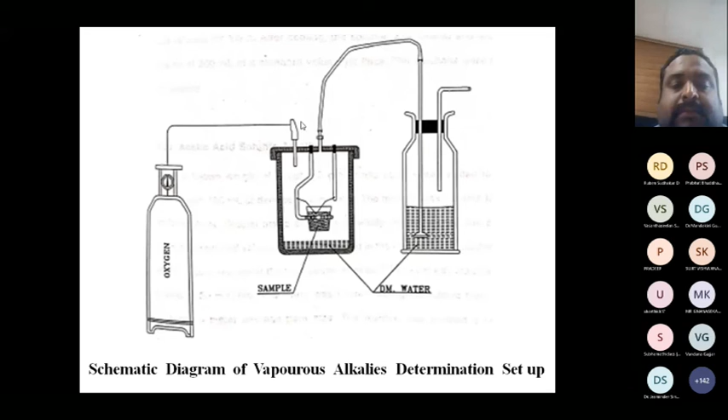This gives a direct measure of vaporous alkali, because in the bomb calorimeter experiment the combustion temperature inside is around 2000-something degrees. Straight away, all the vaporous portion comes out, and after cooling to 12-13 degrees centigrade, I try to measure the alkalis from these two washings of water, the DM water and this water. So that's also added here as vaporous alkali, collected straight away from the bomb washing. So water soluble, acetic acid soluble, and hydrochloric acid soluble fractions of sodium oxide and potassium oxide are the things I measured during my research project. This is a direct measure of vaporous alkali, whereas the others are indirect methods of water soluble and acid soluble content, which we assume to be vaporous alkali. Instead, the directly vaporous alkali is measured by the bomb washing method.

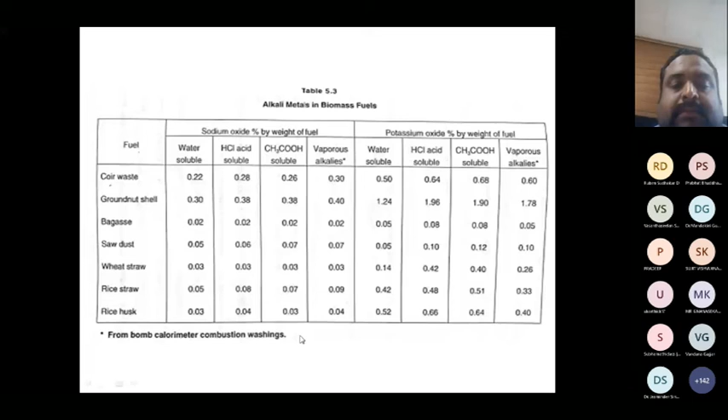The last one is the ash fusion temperature—the observation of the temperature at which the cones are prepared.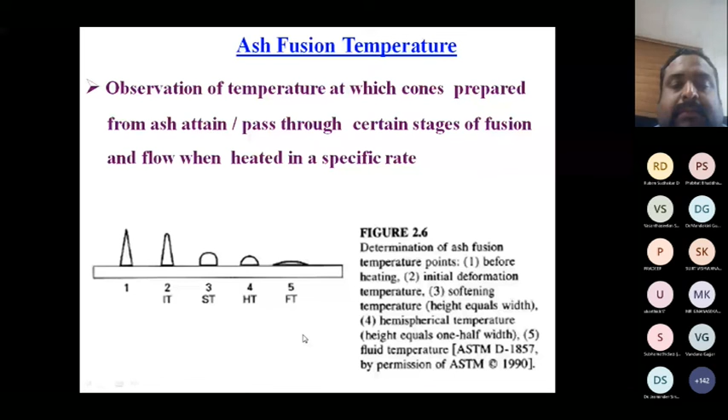So indirectly, ash fusion temperature is a measurement of melting characteristics of the ash. This is normally adapted for coal, and the same thing we are adapting for biomass fuel also. The standard ash fusion test, applied for the fusion behavior of coal ashes for many decades, is based on determination of 3 or 4 key temperatures as I told you: initial deformation temperature, softening temperature, hemispherical temperature. It was developed specifically for the aluminosilicate coal ash system, but the application of this procedure to biomass fuels, most of which are non-aluminosilicate...

You can see biomass ash has no alumina, so biomass ash is a non-aluminosilicate ash. So for the application and technique available for biomass, what do you think? A very cautious approach has to be made.

Many biomass ashes melt at temperatures less than 1000 degrees. Another important parameter: most coal ashes melt around 1200, 1300, 1400 degrees. Many biomass ashes melt at temperatures less than 1000 degrees, and a significant amount of ash calcium is highly volatile also - we have seen that a significant portion of the inorganics goes as volatile. So heating and hence the AFT technique should be treated with great caution. When doing AFT for biomass ash, something is volatile, there is no melting at all, so adaptation of AFT technique for biomass needs great caution.

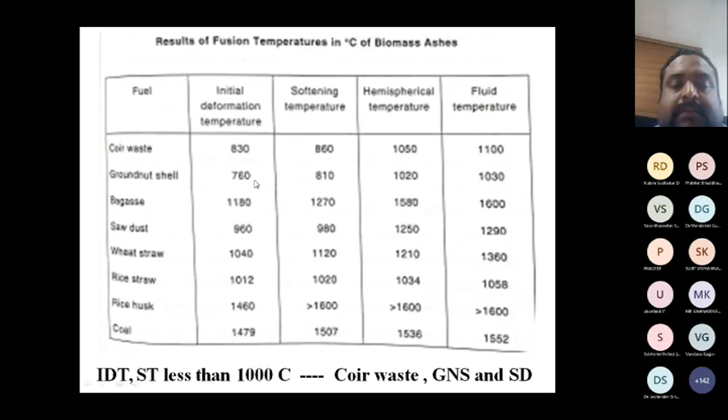So these are the results of the biomass ashes for ash fusion temperature. You can see here, coir waste, IDT and softening is less than 1000 degrees for coir waste, groundnut shell - see, 830 degrees. Groundnut shell 760 IDT. Less than 1000 degrees. So these are the ash related problems.

One is slagging. Slagging, in general terms, you can call deposition, corrosion, and erosion - these are the two issues of ash related problems: deposition, corrosion, and erosion. Deposition is of two types: slagging type and fouling type. Deposition in boiler sections where radiating heat is dominant is called slagging type of deposition. Deposition in the boiler convective zone is called fouling type of deposition. These are the two types of deposition behavior.

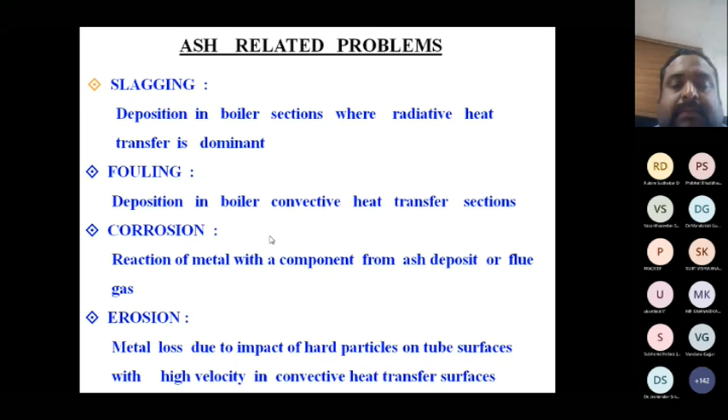Second problem is corrosion: reaction of the metal with components from ash deposit or flue gas. Third problem is erosion: metal loss due to impact of hard particles on the tube surface. Mostly in biomass, there cannot be any erosion - they are soft fuels, there cannot be any erosion. Only you will have deposition and corrosion. Again, for deposition and corrosion, there may not be much slagging type of deposition in biomass - you have fouling type of deposition and corrosion. These are the two issues concerned with biomass.

So these are all empirical, conventional ratios to assess the slagging behavior of coal - silica ratio, base to acid ratio, or slag. These are different conventional ratios available for assessing slagging for coal. So based on the ratio, if iron oxide is 3 to 8, we call it non-slagging, 8 to 15 medium slagging, 15 to above - all these are decided for coal, not for biomass.

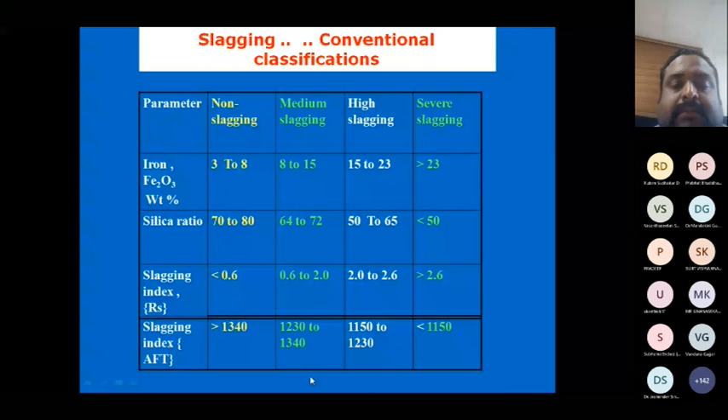So traditional slagging indices are based either on the results of the ash fusion test or chemical composition of the coal ash. The application of coal ash slagging indices to biomass ash, which is chemically very different, can be problematic, and great care should be applied when interpreting conventional slagging index values for biomass.

With caution - when considering potential slagging behavior of mixed ashes, suppose you are planning for co-firing, like the Government of India has told 11 power plants to go for co-firing, 5 to 10% biomass along with coal. So when considering potential slagging behavior of mixed ashes from the co-processing of biomass with coal, it is clear that apart from silica, the significant components of biomass, principally alkali and alkaline earth metals, act as fluxes.

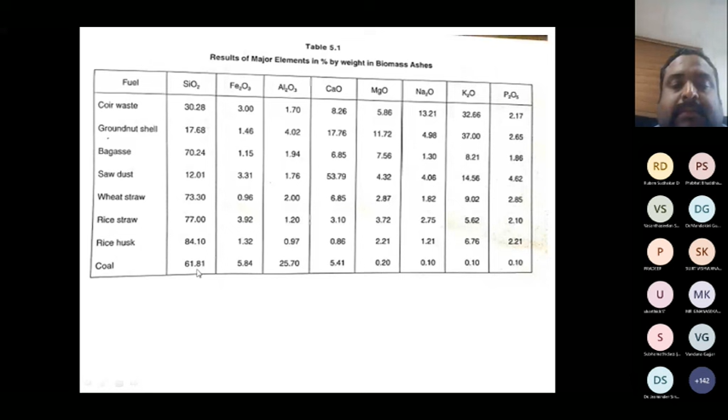For example, if you see coal ash chemical composition, coal ash has a majority of 61% silica, 25% alumina - so almost 90% is silica and alumina.

Other things are very negligible, whereas if you are going for co-firing with biomass, biomass has lot of sodium and potassium, and these act as a fluxing agent. Here only the problem occurs. These are all very refractory material, alumina, silica - nothing will happen normally. But when co-firing with biomass, these act as fluxing agents and bring down the melting temperature of the coal ash, since you are adding fluxing agent in the form of biomass. So co-processing of biomass with coal results in a reduction in fusion temperature of the blend, and hence increase in slagging potential.

That is why the restriction is 5 to 10%. Don't go beyond that, or you will end up with problems. Because biomass components are all fluxing agents, sodium and potassium, they bring down the coal ash melting temperature to a lower side. So for co-processing of biomass at relatively low levels, the mixture is still predominantly alumina silicate, so cautiously, with some confidence, you can use the slagging prediction method for coal.

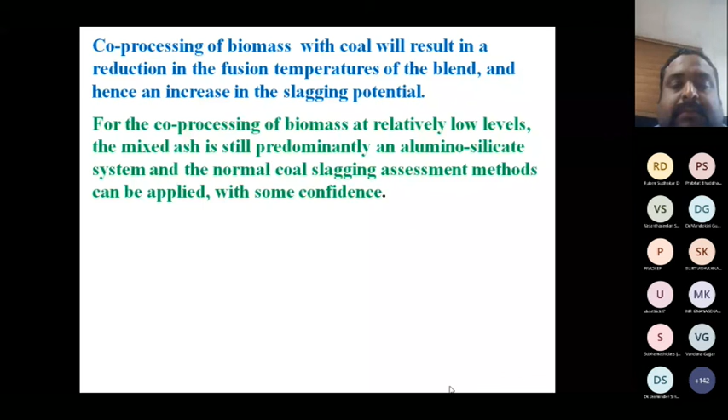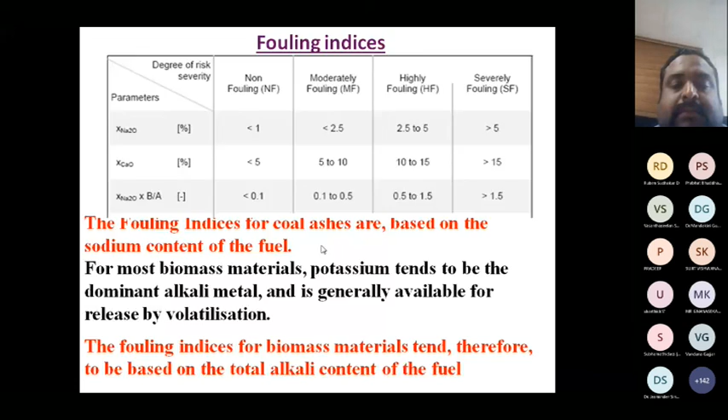In the case of fouling indices, this is available for coal based on sodium content: if less than 2.5% it's non-fouling to moderate, 2.5 to 5% sodium is highly fouling. The fouling indexes for coal ashes are based on sodium content of the fuel because sodium is most available. Whereas in biomass, potassium is potentially available. For most biomass materials, potassium tends to be the dominant alkali metal and is generally released, and it's also partly volatile. So fouling indexes of biomass materials therefore need to be based on total alkali content, don't go for such classification based on sodium alone - instead use total alkali content of the fuel. These are all the classifications: fouling probable, fouling virtually certain, based on alkali index.

Biomass inorganic constituents that are volatile at combustion temperature, mostly alkali metal - sodium, potassium compounds, phosphorus complexes - can be released to the combustion gas in the form of condensable vapor. It's going as a vapor. Then something also goes as aerosols - for example, calcium compound goes as aerosol. The rest of the things go as large ash particles.

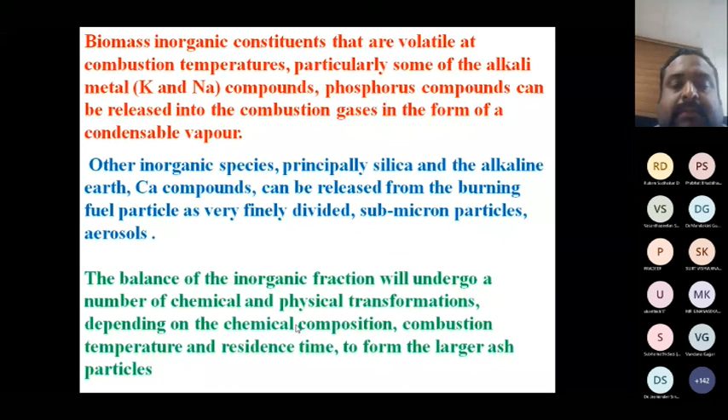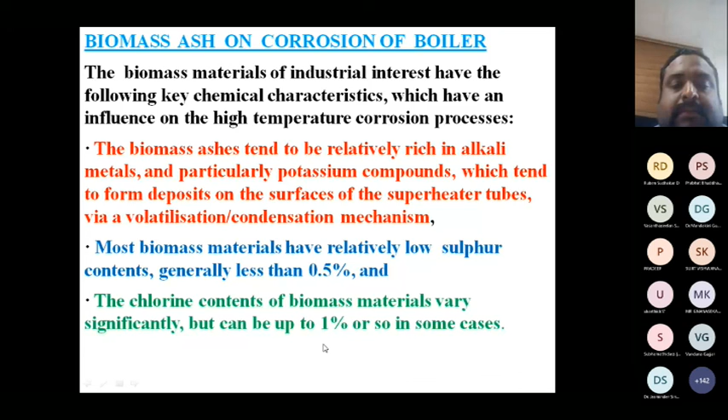Now we're looking at the corrosion aspect, boiler action - probably a few slides will complete it. The biomass materials have the following key chemical characteristics which have influence on the high temperature corrosion process. Biomasses tend to be relatively rich in alkali metals, particularly potassium compounds, then they have low sulfur, and significant amount of chlorine. So potassium and chlorine play a vital role in high temperature corrosion. Significant corrosion of conventional superheater materials has occurred when firing most biomass with metal temperature exceeding 450. So these are severe corrosion associated with biomass ash deposits containing alkali metal chloride. So if you have potassium and chlorine, potassium chloride, you have significant amount of superheater corrosion.

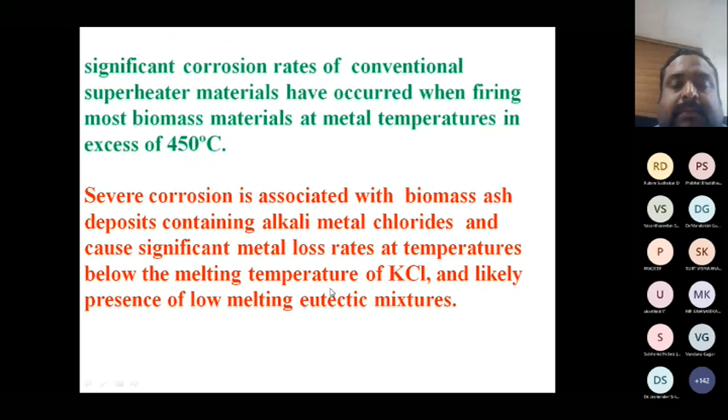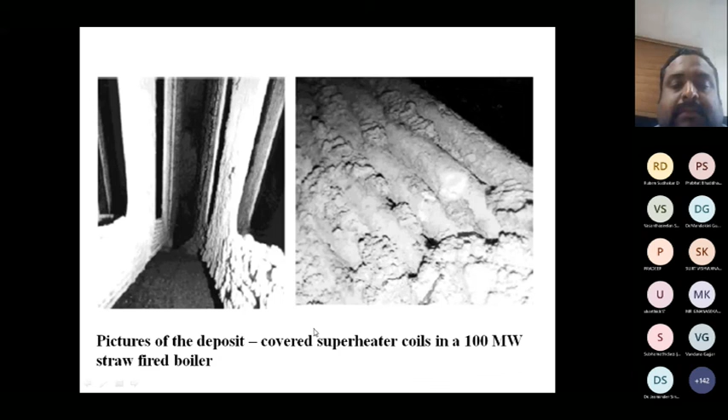So I have already covered the characterization techniques of everything with respect to corrosion. With this, I am done.